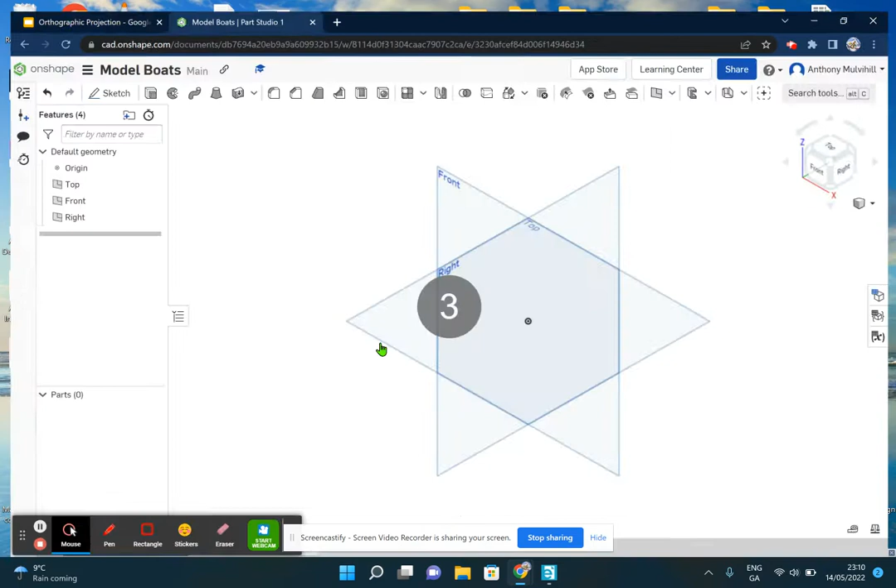In today's video we're going to do some OnShape exercises based on two boat questions from the orthographic chapter. One is from the old Understanding Technical Graphics textbook, and the other is from the current World of Graphics textbook we're using in class. Two different boat questions, but they'll teach us different skills. We're starting with this one.

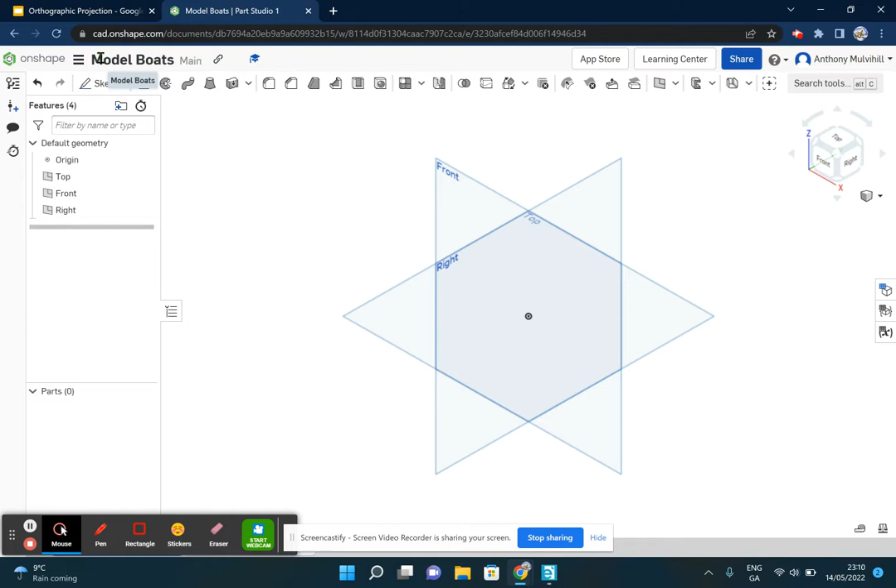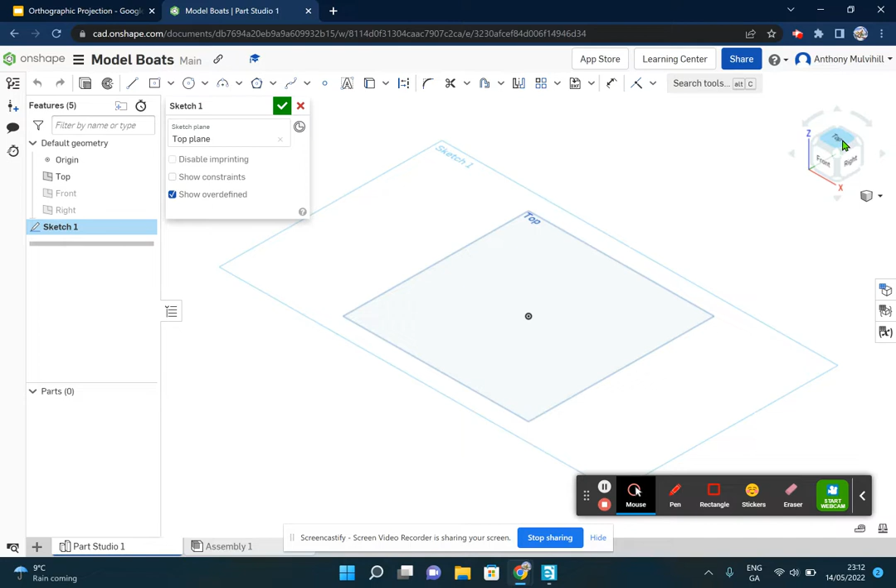Starting here now, I'm going to turn off my front plane and my right plane. The plane I want to sketch on is the top one. So select the top surface, select sketch. All the tools are active to me in the top. I'm going to select the top plane so I'm looking nice and straight at it, and then select the line tool.

I'm going to start off by selecting the line tool, and I'll show you a new tool today called the construction tool, right here. Once I select that, notice how the two of them are highlighted blue. Now, starting on the origin, I click and drag out, and notice how the line comes in as a hatched line. I'll turn off my line now — you can press escape on your keyboard, or right click and click escape line. This line is hatched because I activated construction, which is very helpful here.

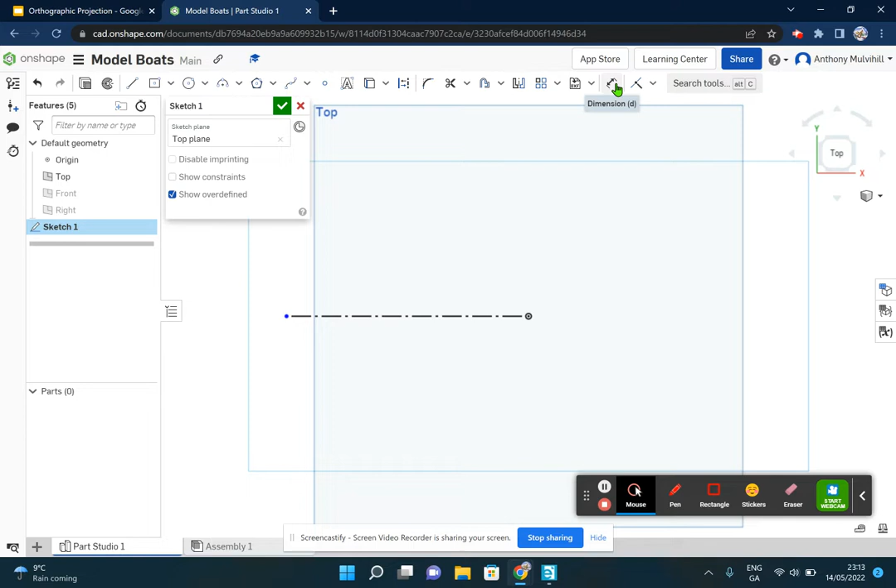Now we're going to put a dimension on that line. I'll click on dimension, click the line, drag down — I want that line to be 140 millimeters. You can see it went off screen there, so I'll bring it back into the center by selecting top.

Now it's 140 long. What I want to do is build half the boat. I'm going to select line, but this time do not select construction. Starting here on my origin, I click and drag down, making sure it's vertical. Click, then drag across until it comes to about here. Click, then drag until it comes to the top point. Click — now you can see it's like I've built half of the boat. I could do it on the other side, but you'll see what I'm going to do instead. I'll start by dimensioning half of it — clicking on dimension, this portion here is 25.

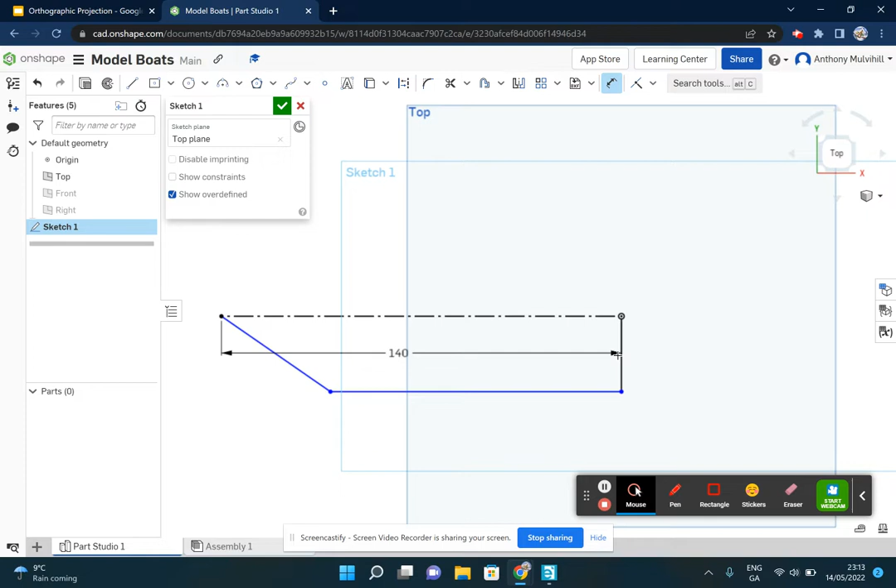This line here is 105. Notice how it's gone from blue to black, fully defined.

Now, instead of redrawing all of that and putting the dimensions in again, I can use a handy little tool here called mirror. So when I select that, notice it's telling me to select a mirror line. What we're doing here is called axial symmetry.

This dash line that I put in at the start, I'm going to select that as my mirror line. Notice how now it's saying select entities to be mirrored, telling me to select the things I want to copy over that line.

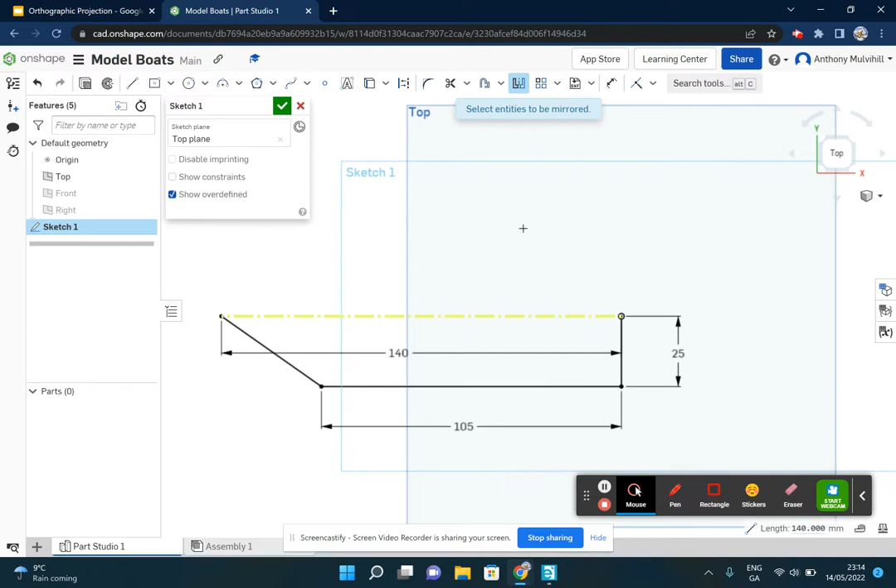So I'm going to select this line. Notice how it's coming in on the opposite side. This one, and then finally this one. And there's our sketch complete.

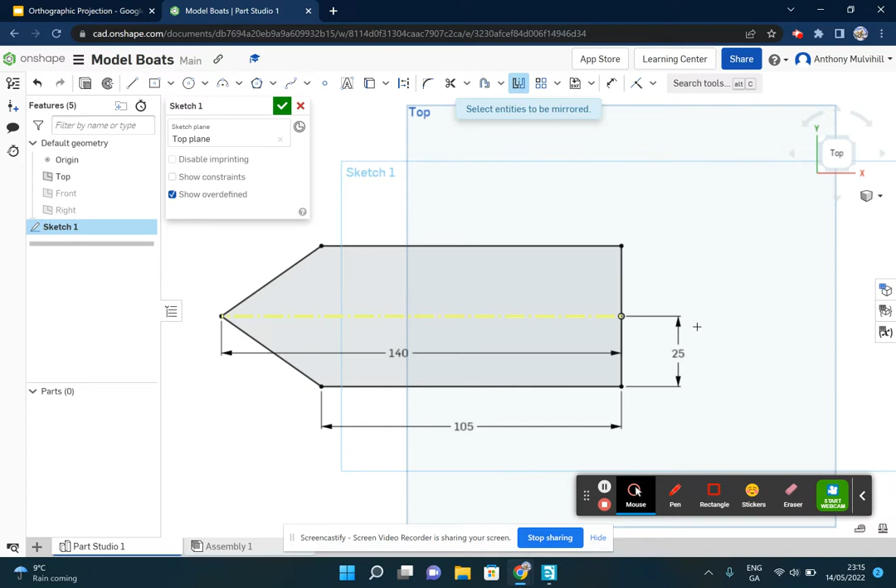Now, I could have sketched it like that from the start, but you'll see in a while why I actually did it that way with the center line here in the middle. So now that that's done, what I'm going to do is go into a 3D view.

Select this guy here, and with that sketch done, I'm going to extrude that up. Select my extrude icon, and I'm going to extrude it up by 15 millimeters, and click on the green arrow.

So I'm going to go back in here, and I'm actually going to turn off my top plane now. And I just have the model there. Now, what I'm actually going to do is I have to draw on the front plane. So I'm going to turn it on again, just so you can see it.

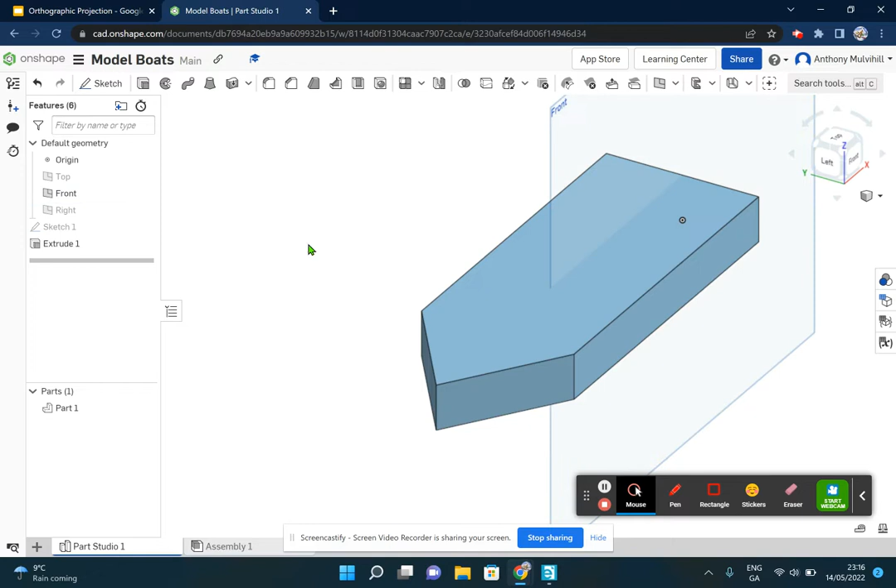Now notice how the front plane is actually going through the middle of our object. If I go here, you can see the front plane is in the middle of our object. So I'm selecting it there, it's in orange, going right through the middle of the object.

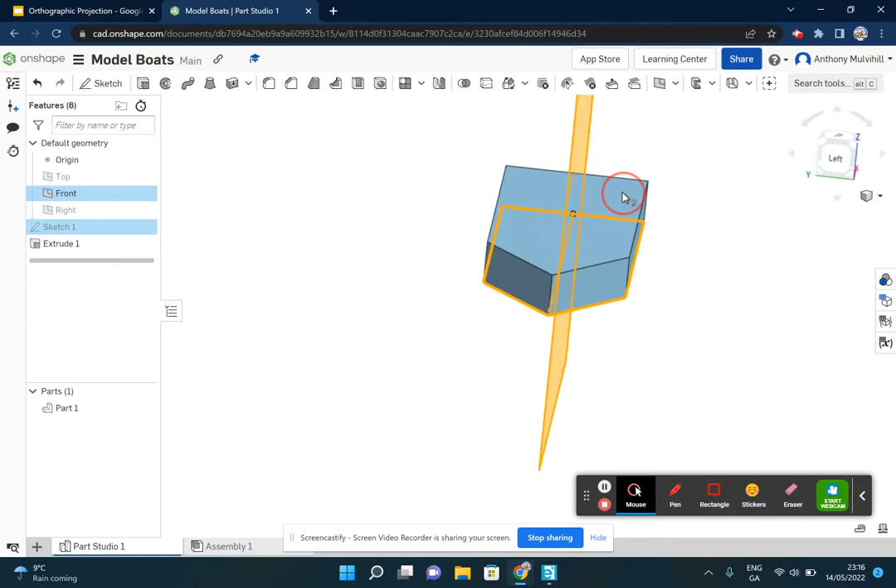That's the reason why at the very start when I did my sketch, if you remember this center line, this center line is actually in line with the front plane. And you'll see why I wanted it there in a minute.

So this plane I want to sketch on, I said, was the front plane. So I'm going to actually select the front plane and select sketch. You can see it here, sketch 2 box is after coming in.

So what I'm going to do is select the front here now. And to start off with, I'm going to select a line again. And once again, select construction.

So I'm going to come down here to the very bottom. Roughly not on the origin, but maybe a little bit there. You can see it here.

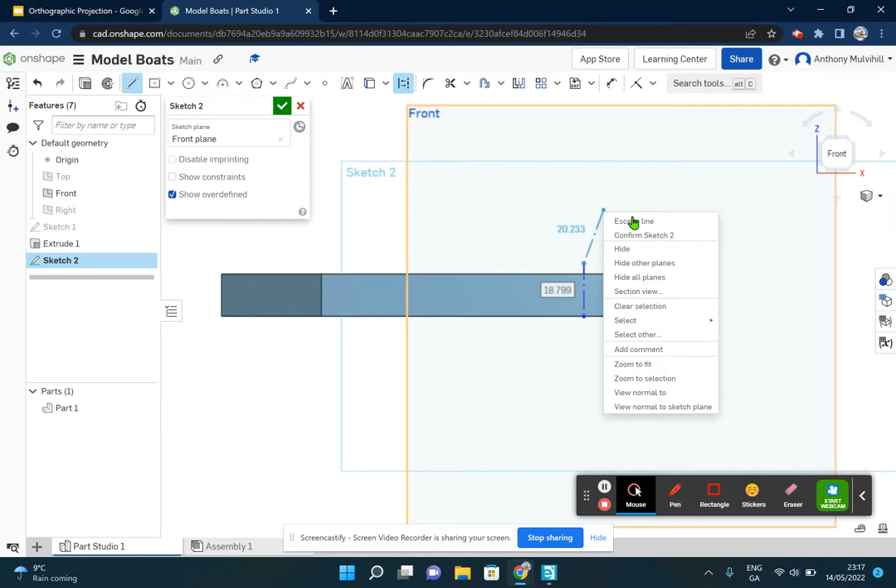And starting on the bottom, I'm going to click once. I'm going to drag up and click again. Now I'm going to escape that line, right click, then left click on escape line. That'll do it. Or alternatively, you can just press escape on your keyboard.

And that line there that I just did, the reason I drew it is because I wasn't able to start. If I select line, you can see here, I actually can't draw a line kind of right on the line there where I want to start.

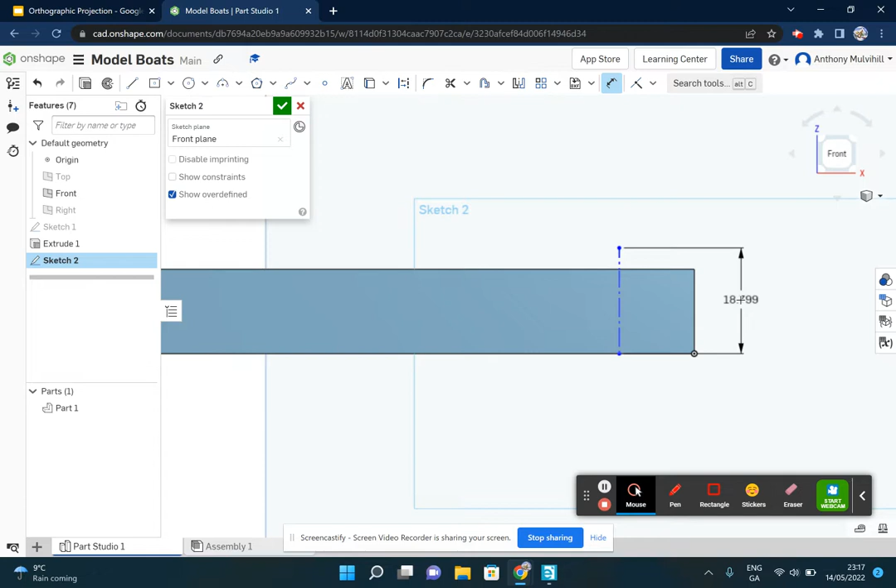So it's kind of funny how that happens, but I'm going to go into dimension. And now what I'm going to do is click on this line, drag out. I want that to be 15.

Now I have a point to start with right here, which is going to be helpful to me, right in the middle, you can see it. So using that point, I'm going to go back to my line tool. This time, not construction, I'm not going to use that. I'm going to start drawing the rough outline.

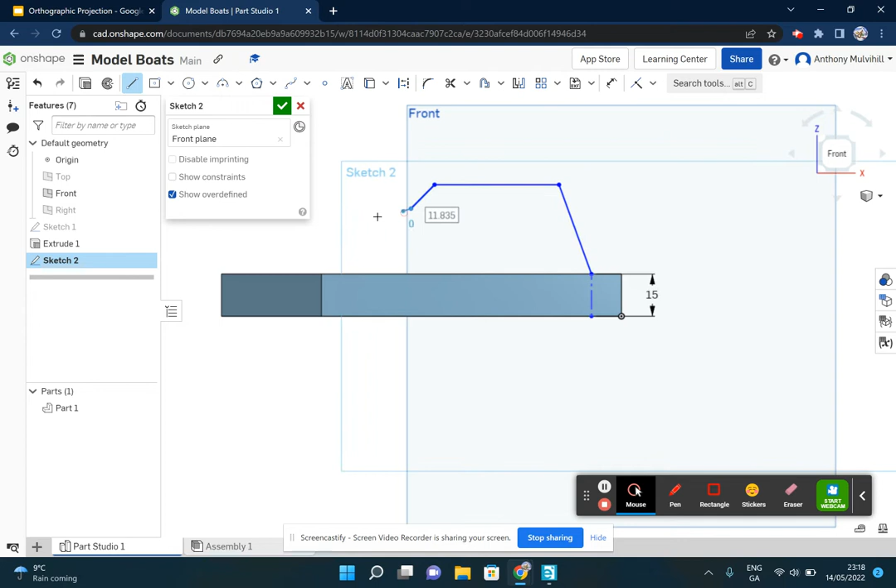Click here, drag up, click, drag out, click, down, kind of at an angle. Then it goes down here another bit. Then it's going to go down here and bring it back home to here.

Now there's my outline. Going to 3D, you can see it there. It's right in the middle, which is going to be really helpful to me in a minute. I'm going to select front again, and I'm going to start by dimensioning it.

So the first thing I'm going to do is the dimension between 2 points. I'm going to dimension from this point to this point. That dimension is exactly 10. Now I'm going to dimension between this point and this point.

Select the point, then select this point. You can see here it can give me different dimensions. I can do the line, I can do the height. But what I want is that kind of horizontal distance there, or the length distance. That is also 10.

Okay, the overall height of it from here, select the line, is 30. Now I'm at the right height.

The next height I want is this one. Select this point, and I want the height between the two of those. So just make sure you don't drag out here like this. You want the height between them, okay? The vertical height. Click. I want that to be 10.

Now the next height I want the difference between is this one and this one. Once again, drag into the correct position. I want this to be 10.

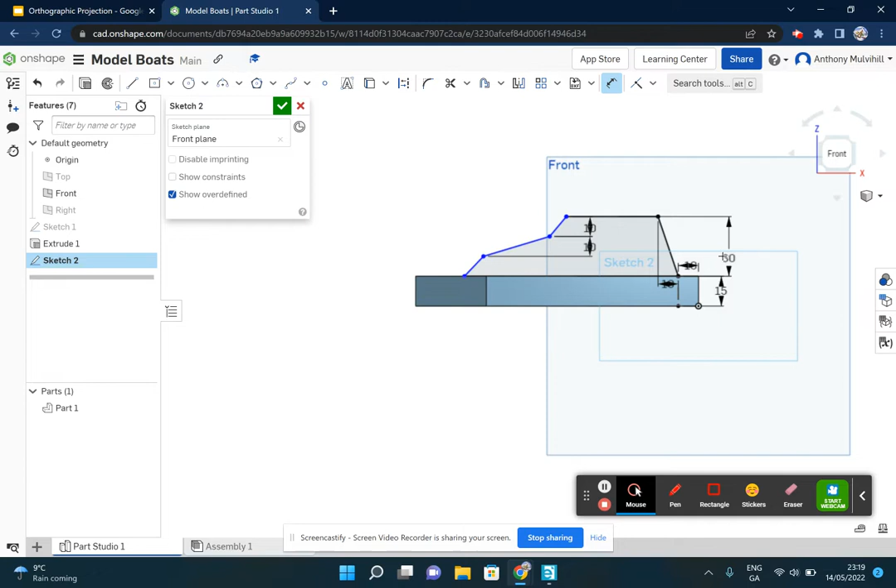And then finally, the last one is 10 between this point here and this point here, because I've already told it at the very start that the overall height is 30. Okay, just bring that in there, making it look neat and tidy. You don't have to.

Now you can see here it's not fully defined yet because I've got some blue lines still left, so I need to put some dimensions on those. So I'm going to go back to my model there.

And the portion here you can see at the top is 40 millimeters, and then it's 5, 35, and 10. So 40, 5, and 35. Okay, so this line here is 40 millimeters long.

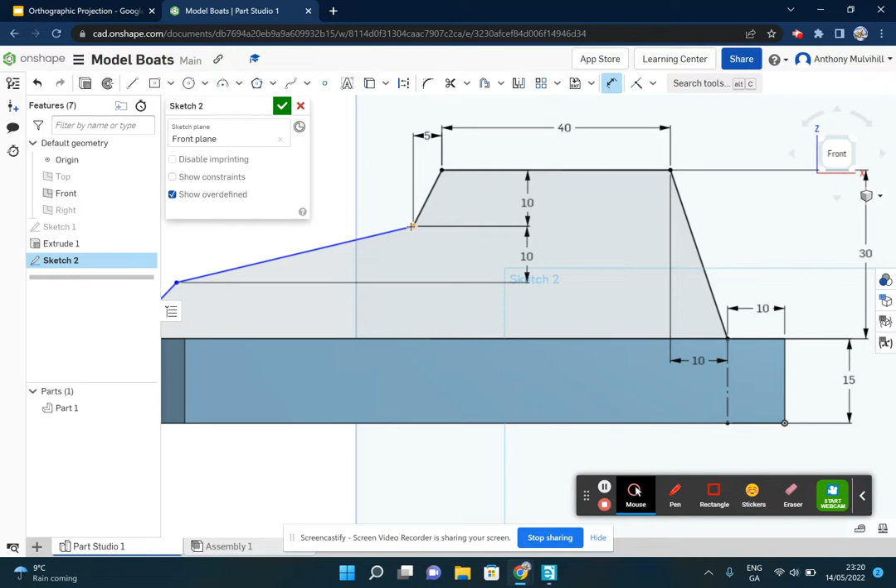The distance between this point and this point is 5. And then finally, the distance between this point and this point over here is 35.

And then finally, I think the last one between this one and this one, trying to be sure, I think it's 10. Let's go back and check that. Yeah, it's 10. And there we have it.

There's our sketch fully defined. It's gone from blue to black.

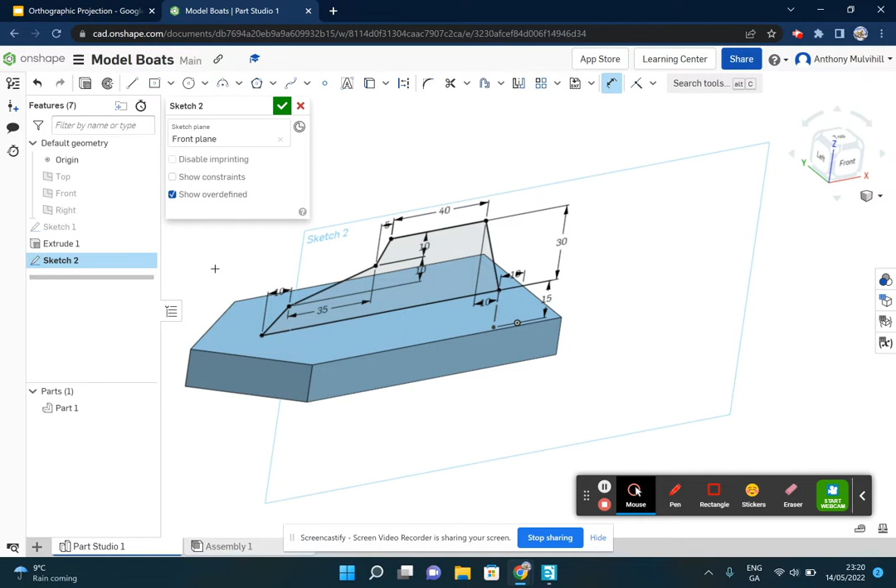Now what I'm actually going to do is I'm going to extrude. I'll turn off my front plane there just to make it a little bit neater. And I'm actually going to extrude it now. So I'll just show you there. So you can see here what's going to happen now.

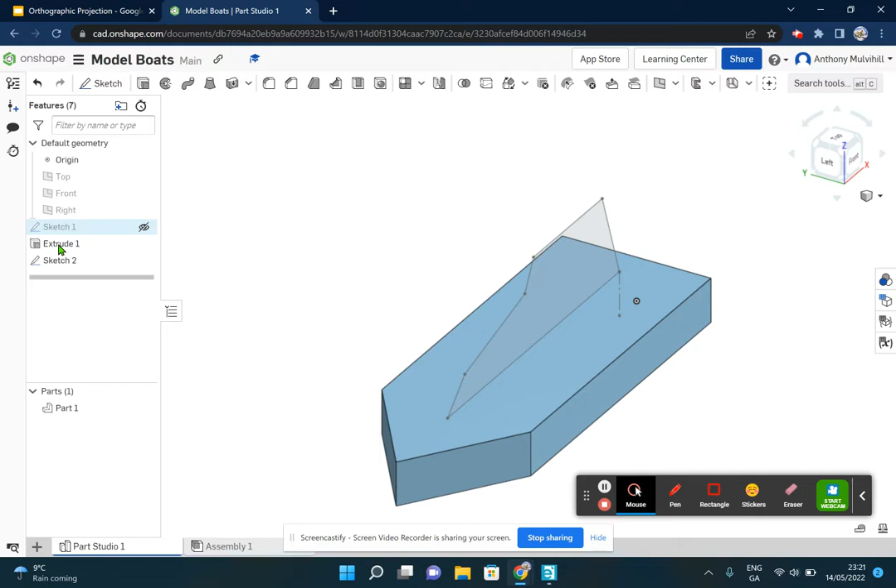When I select my extrude icon, okay, I'll actually show you a little trick you can do. If I clicked on the green arrow here, you can see the sketch has kind of gone grey. Now don't worry about that, but to get back into that, if you double click on sketch 2 over here, you can see anything I've done is in this area here. It's your design tree. If I double click that, the sketch becomes active again.

Okay, so I'm going to go up here to my extrude icon, select that, and notice how that has happened there. Now I don't want that to happen. If we look at our model, okay, I'm after modeling in the middle. I'd like it to kind of go both ways. So there's a new little trick we're going to learn here in this kind of area.

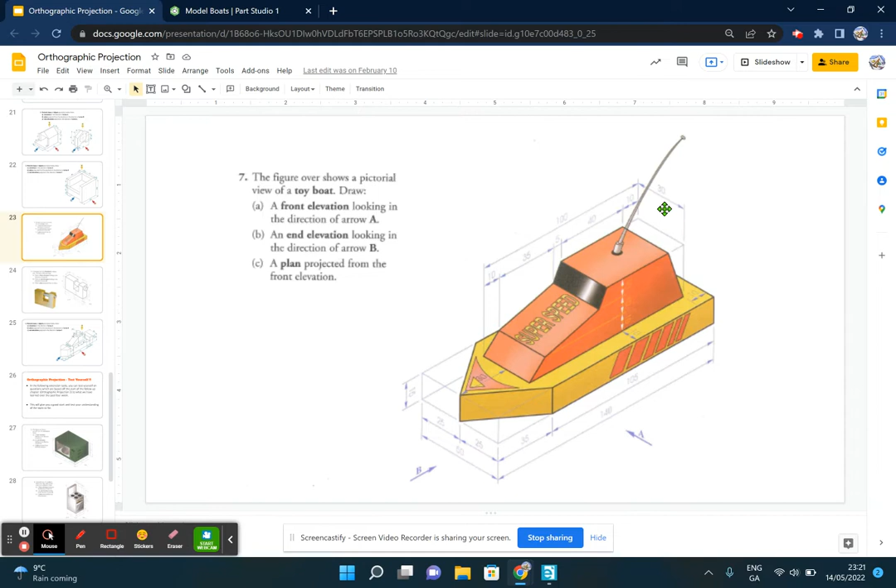So you can see here, the distance, first of all, I'm actually going to change that to 30, okay, because that is actually the width of it all together, 30 up here. But what I'm going to do is, where it says blind, I'm actually going to click on the down arrow there, and what I'm going to do is, I think it's up to... no, apologies, up to face, up to part, up to vertex.

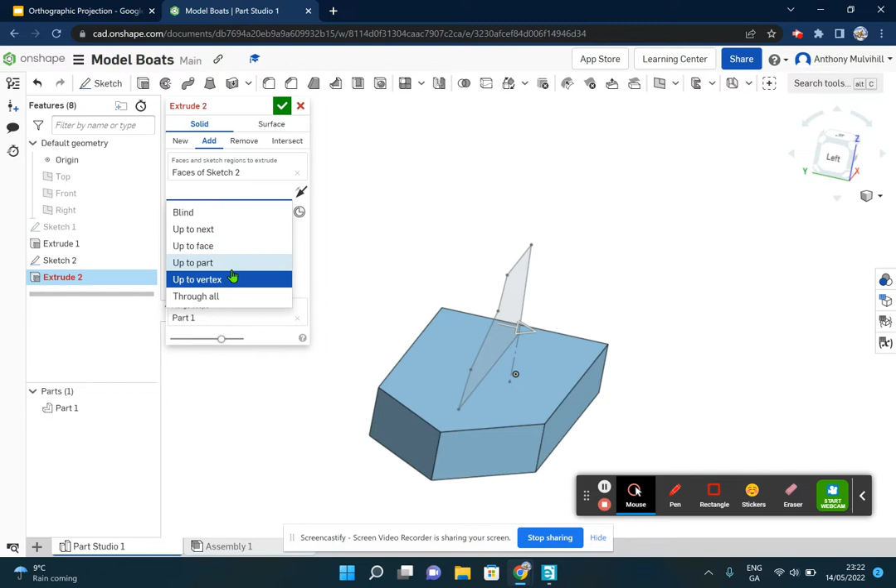Blind. Oh, apologies. Blind and then symmetric. I'm getting mixed up with my SolidWorks there for a second. I was just wondering. So select blind, that's what it is. In SolidWorks, it would be mid-plane, but in OnShape, you select blind and then you select symmetrical. And what that's going to allow us to do is we're going to go 15 millimeters this way, 15 this way, but essentially 30 overall.

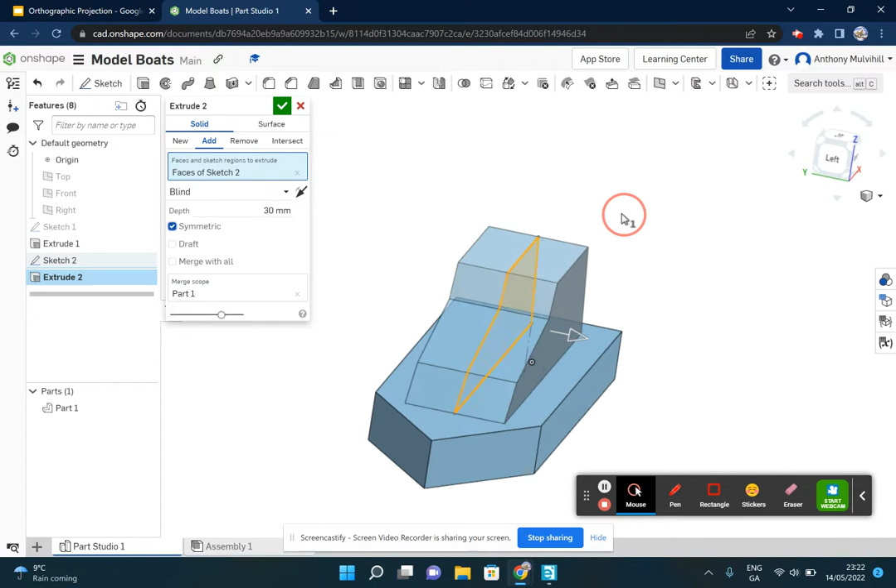And there we have it. Select the green arrow and we're done. Model complete. Very first model done.

Okay, so now what I'm actually going to do is I'm going to go down here. I'm going to select this little plus icon. And then I'm going to click on Create Part Studio.

Looking in the direction of arrow A probably makes the most sense, because either way we'll have to do cuts - either in the direction of arrow A for the triangles, or in the direction of arrow B looking down on top for this little section. So there's a couple of ways to do it. I'm going to start modeling using arrow A.

Looking at the overall length, it's 25 plus 20 plus 20 is 65. 65 plus 5 is 70. 70 plus 90 is 160. And 160 plus 20 plus 20 is 200 long. It has a height of 40. There are various sections where I'll have to put in measurements.

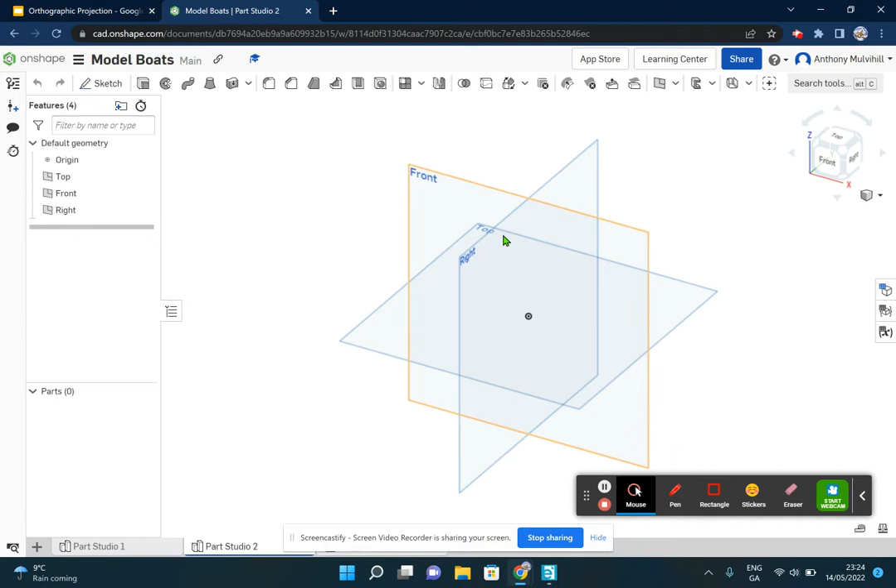I'm going to start modeling on the front plane and draw in this bottom section here. Going back into my model, I'll start by deselecting the top plane and the right plane, select front, and select sketch.

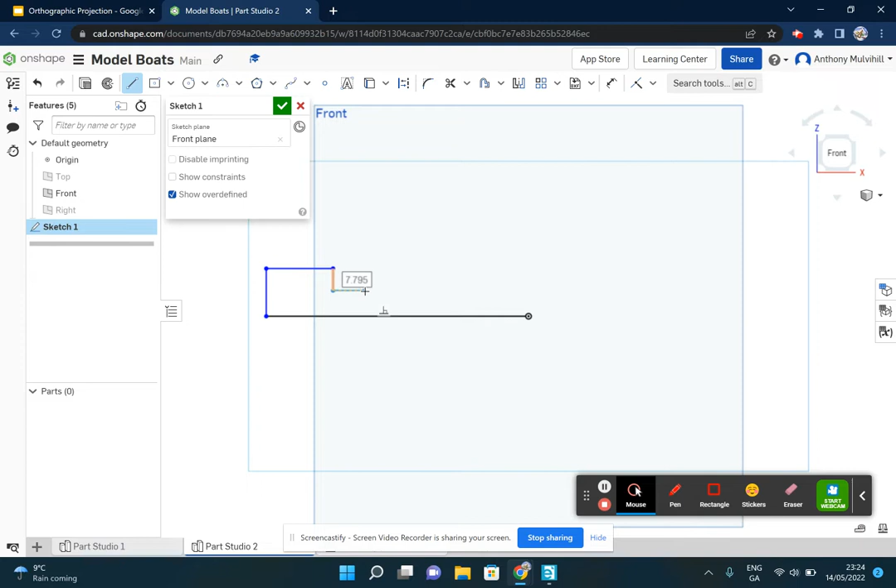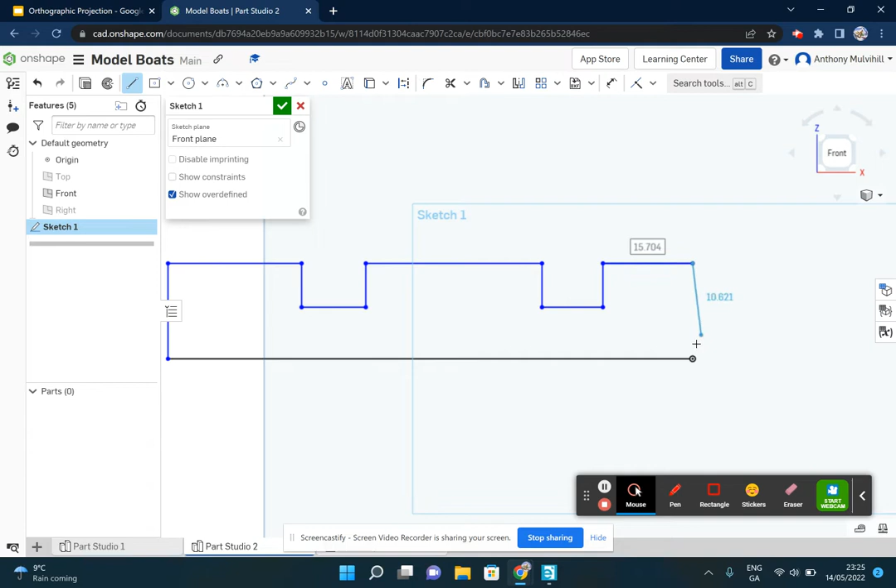Looking straight at the front plane, I'm going to use my line tool and roughly draw this. It comes down here, goes across, then back up. I'll zoom in to make sure I'm at the exact same height as this guy - you can see I can map over to it. Going across, I want it to be the same depth as this one, so bring it across, mapping onto it. Same height, back over the origin. There's the rough shape of it.

Now I'll put in a few dimensions, starting with this one - 200. This guy here is 40 millimeters. And one other measurement I know is the height between here and here, which is 20 millimeters.

You can see because I gave this a relation, this one has dropped down as well. Now I'm going to go back to my drawing to check some of the other measurements.

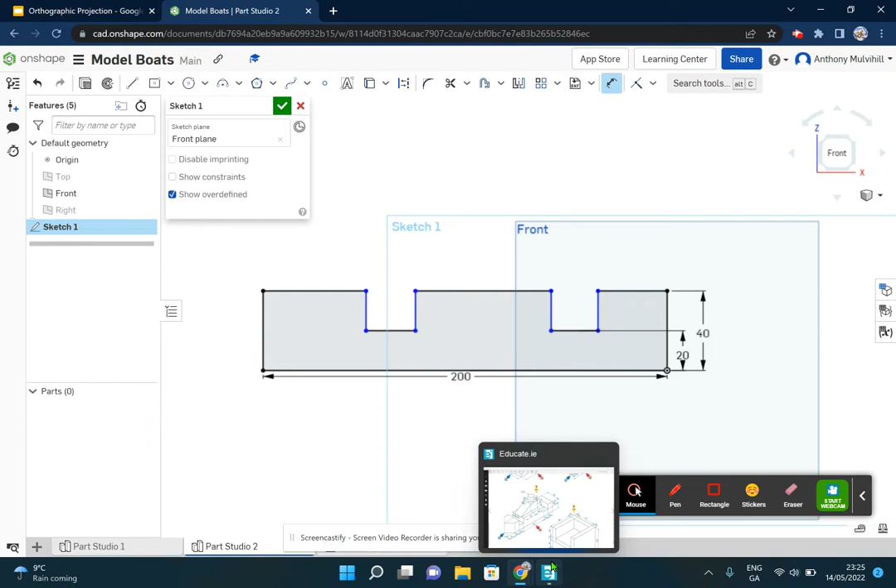I have a length here of 20, 20, and then further in, 20, 20, 95, 20, and 20. So that's 20, 20, 95, 20.

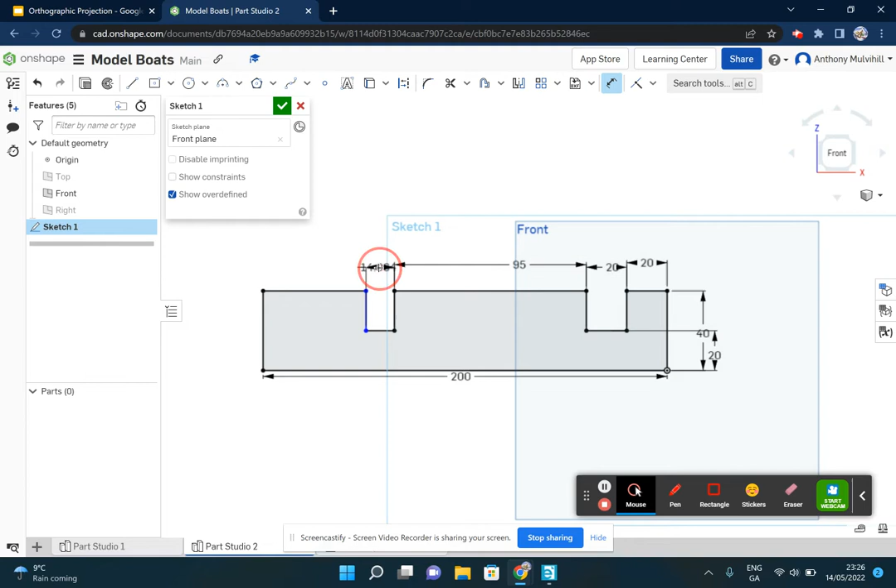Starting with this guy, he is 20. This guy is also 20. Then I have a distance here of 95. And finally, this guy is 20. There we go, fully defined.

There's my sketch - going to put it into 3D. Now I'm going to check the depth of it, so I have to extrude it by a distance of 50.

Once again, I'm going to use symmetrical like I did previously. The reason is if you look at this section, it's right in the middle - there's a certain gap here, I think it's 10 and 10 either side. To do that neatly, I want the front plane in the middle of my object.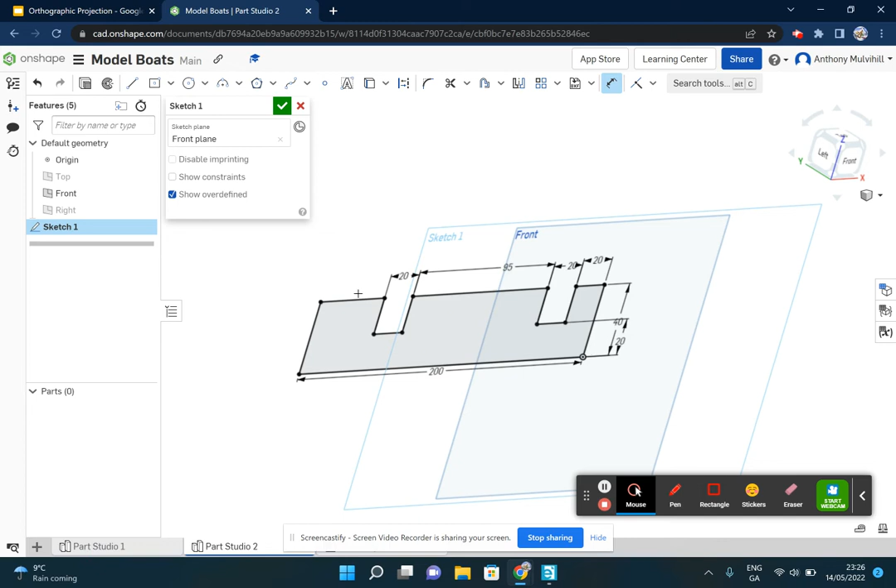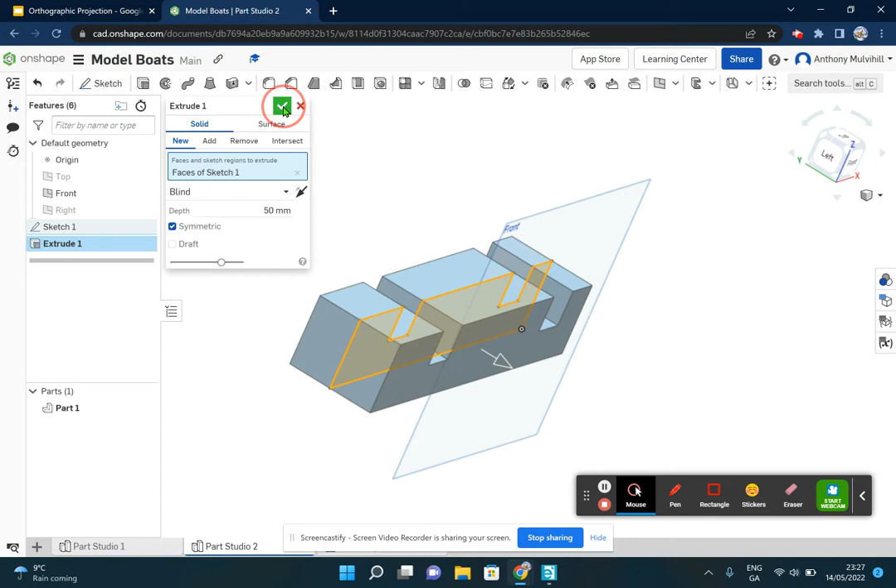Going back into my model, I'll select my extrude icon. You can see it's coming off the front plane. I'm going to change the distance to 50, but instead of coming off the front plane, I want it between the front plane, symmetrical. You can see it's gone between the two. I'll select the green arrow there - that's done. I'll deselect my front plane now, just for a minute.

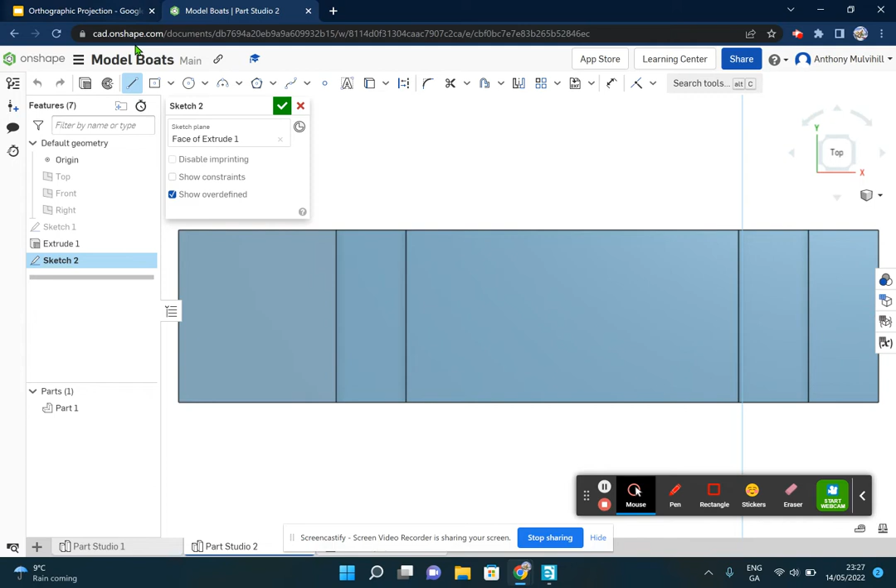Now I'm going to create the kind of nose at the front of it. There's a couple of ways you could do that. I'm going to select this surface to draw on, select sketch, and look at the top of it. Straight away, I'm going to draw in a triangle using my line tool, coming into the middle.

There we go, back here to the corner. Okay, there's that. Now at this point I could do another one over here, but what I'm actually going to do is draw it in very, very quickly - wanting that to map to the same point.

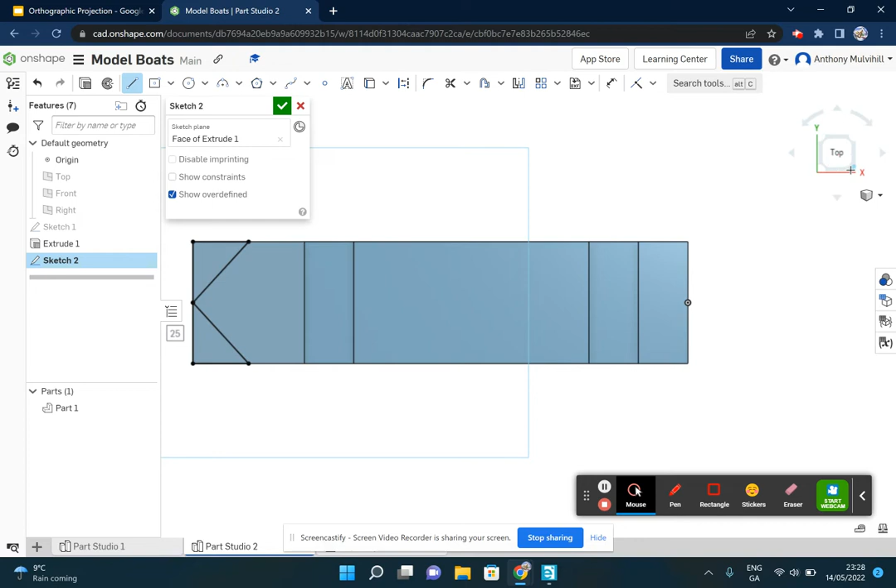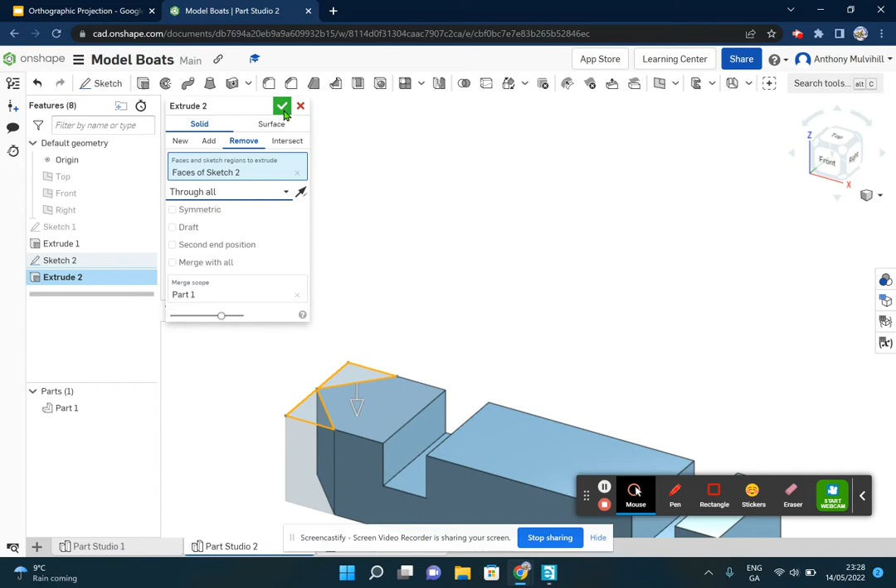Okay, what I'm actually going to do is this guy here. As you can see, there's the two little triangles, so I'm going to go to extrude. Instead of adding them on, I'm going to remove, and instead of blind, I'll say through all. If I just said blind, it would only go down halfway, but by changing it to through all, it'll go through everything. Or I could have dragged down the arrow, accept the green arrow. There we have it, bottom portion of our little boat done.

Now we're going to go on to the next portion of the boat, this little bit here, this kind of triangular and square section, so a square and a triangle joined together. It's going to be looking at the distance there, 45 and 30, starting at the front, so that's 75 starting here, and it's a height of 30. Just remember that, and then we'll put the circle on top.

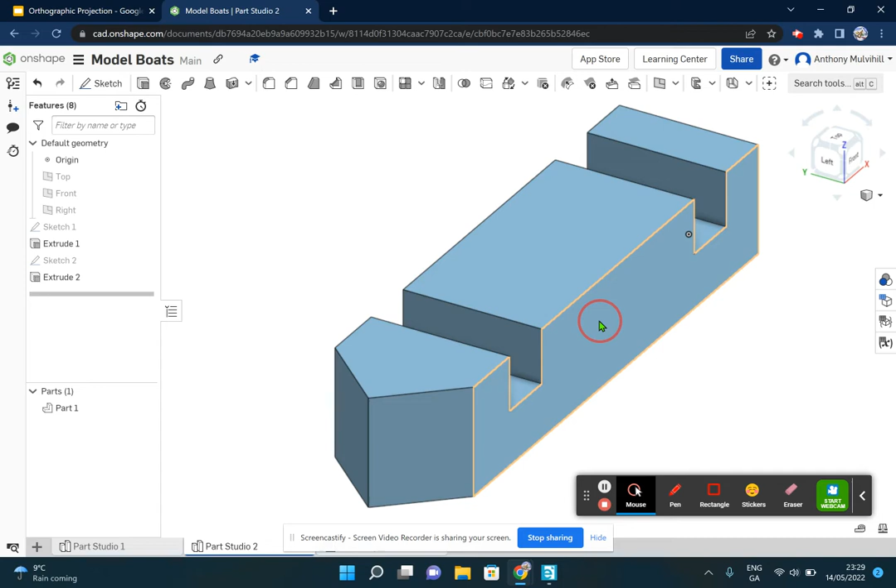Going back in here, I'm not going to select this surface to draw on. I'm going to turn on my front plane. If you remember, the front plane is in the middle, and I wanted it in the middle. So I'm going to select front, and select sketch. Go into my front view, go to my line tool, and select construction, same as last time. From the bottom, around here roughly...

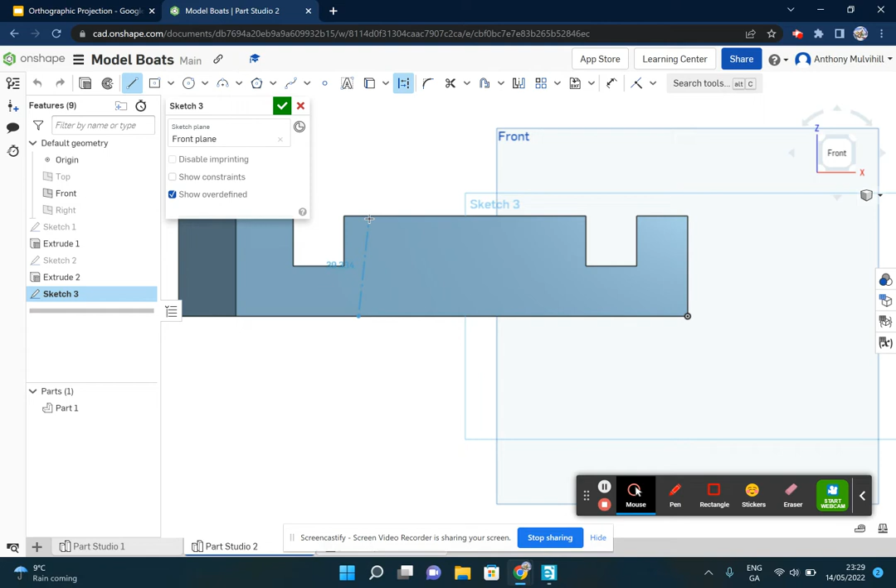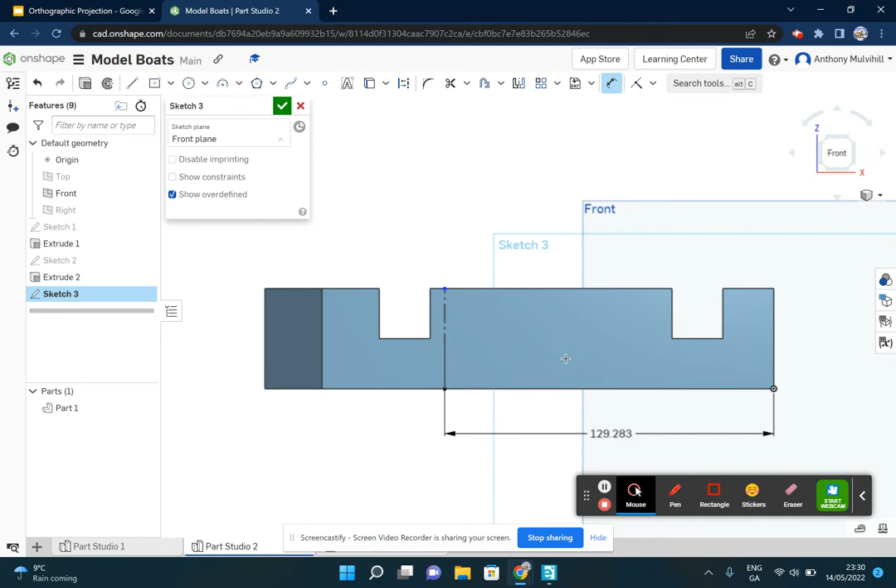Shape the line, and I'm going to smart dimension that line. Now it's going to be a certain distance away from the origin. That distance right there, as far as I know, is 20, 20, and 95, which will be 135. And then the height of it is 40. That will get me exactly into the right position there, where I want to start.

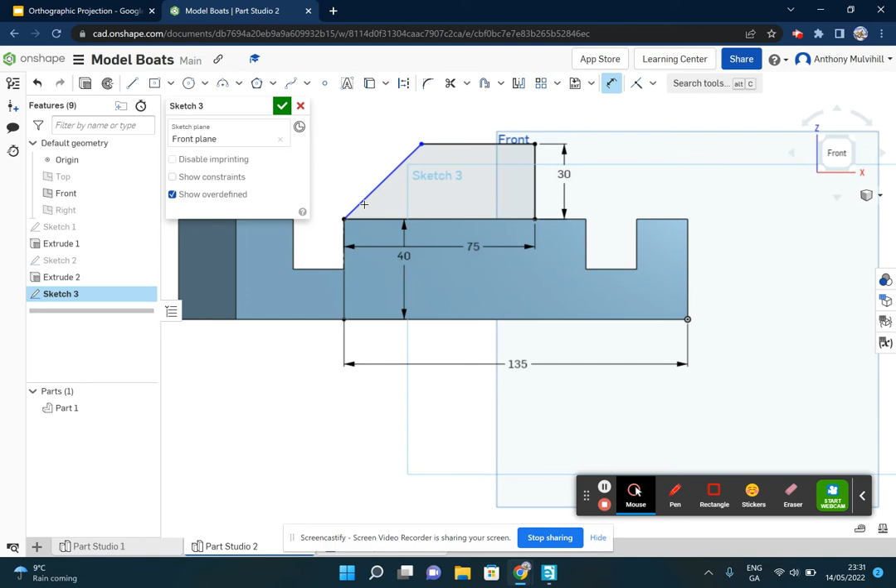So going back to the front, select my line tool, I'm going to start my sketch. Go to smart dimension. This bit here is 75. This bit here is 30. And then I just have to go back and check here now - it's 45. And then the distance from here to here, put it up there, is 45. There we have it.

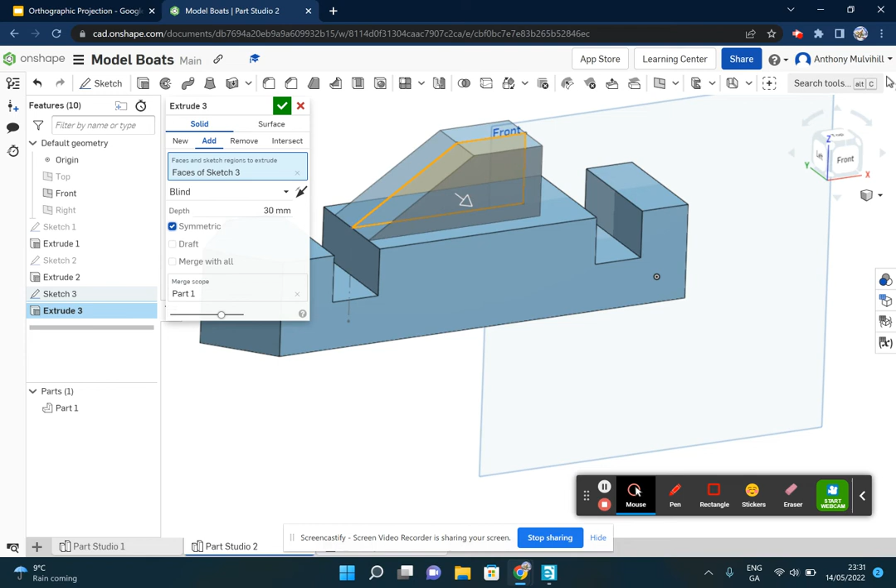There's our structure. I'm now once again going to extrude that. This time I'm extruding it by 30 millimeters, and once again I want it to be symmetrical. You can see there, it jumps into the middle, accept the green arrow. There's our second portion done.

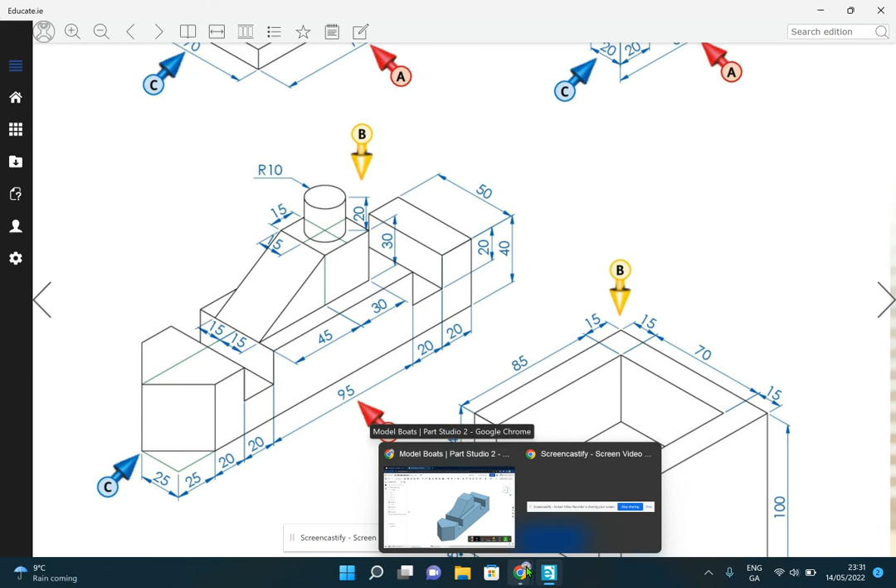What I'm going to do now is turn off my front plane. You can see here, all we have left to put in is the little chimney on top, which has a radius of 10 and is right in the middle. To do that, I'm going to select this surface. There's a couple of ways you could do it - you could do a revolve, but I think the easiest way is just a circle.

So select the surface, select sketch. Now what I want to do is find the middle of that, and you can see we can't exactly find the middle. So I'm going to select my line tool and select construction. By doing that, if I start here right in the middle - you can see the middle of this line - click and click down to here, escape your line. Now inside here, I should be able to find the middle of this construction line. So if I highlight the circle, center point circle, there we have it, there's the middle, select on that, drag out, click.

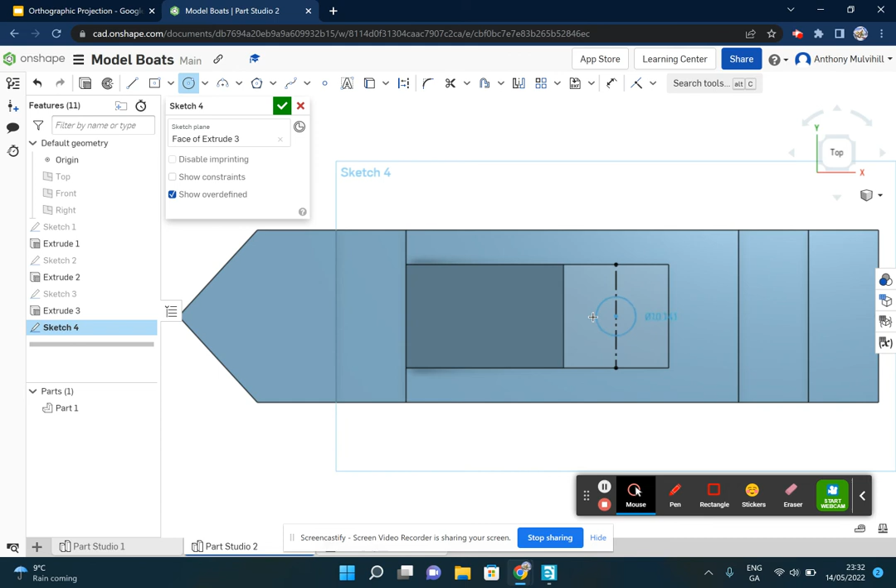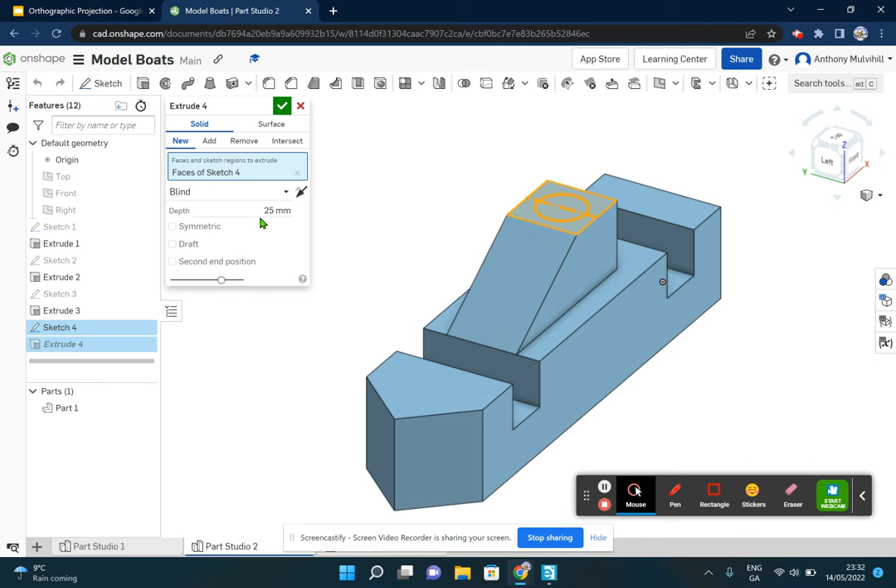And I'm going to put a dimension on that - radius 10, diameter 20. There's my circle. Go back to my drawing, it comes up a height of 20 millimeters. Once again, extrude, no symmetrical here, instead of 25 I want that to be 20, green arrow, done.

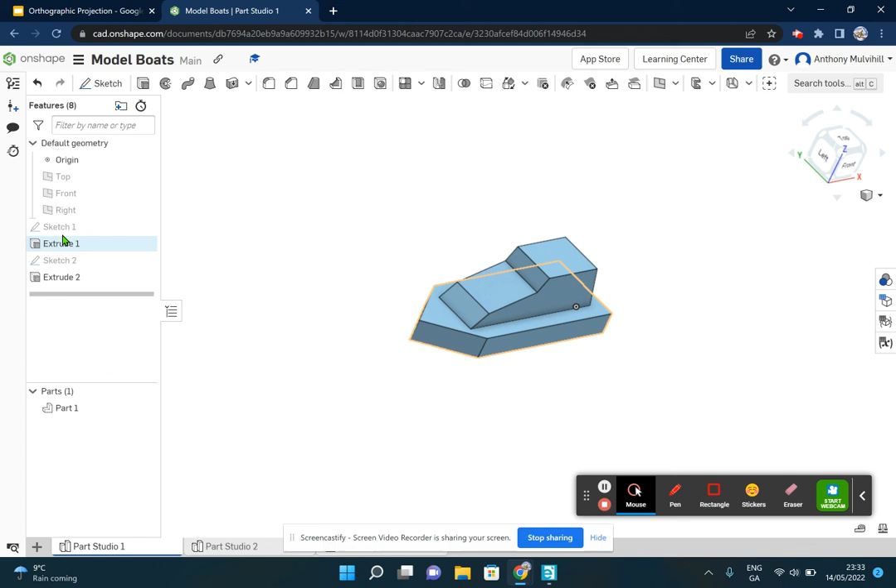Notice how your design tree keeps getting bigger here because the more parts we build onto it, and the more steps we take, it's going to get a lot bigger in your design tree. You can see this one had more parts in it compared to this one down here, where we only did two sketches and two extrudes. In this one, we had 1, 2, 3, 4 sketches and a couple of extrudes.